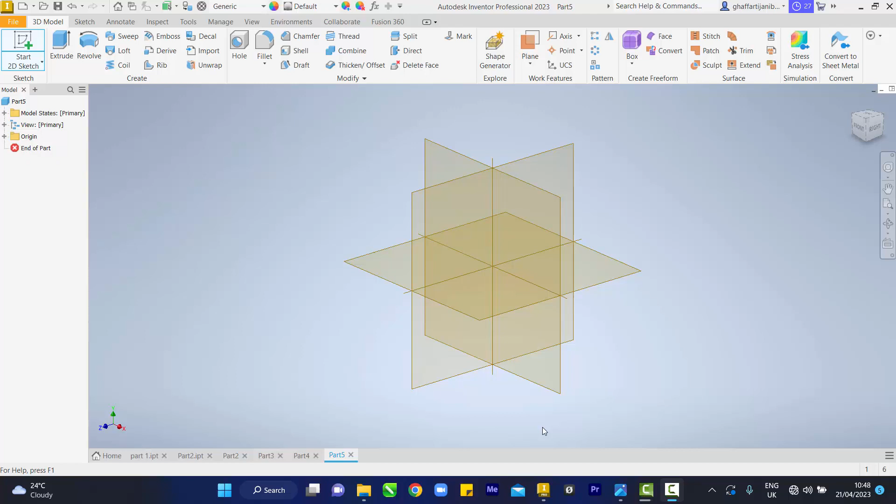Okay guys, next is going to be a bolt.

So I'll pick my circle to diameter 10. Enter. I click OK. Or no, let me try another one. What's the diameter of this guy? Wait. I click OK.

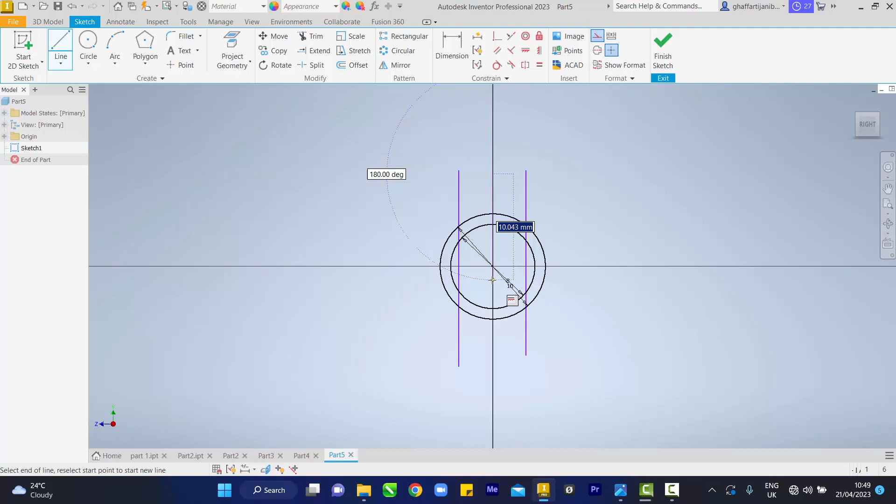Then pick a line to let's draw a very long line. So I'll be drawing a thin line. I just need that to know my center line, that's all. So pick my dimension to, I was told here to here is 5. Enter. Then I pick this 1, 2, 3. I click OK.

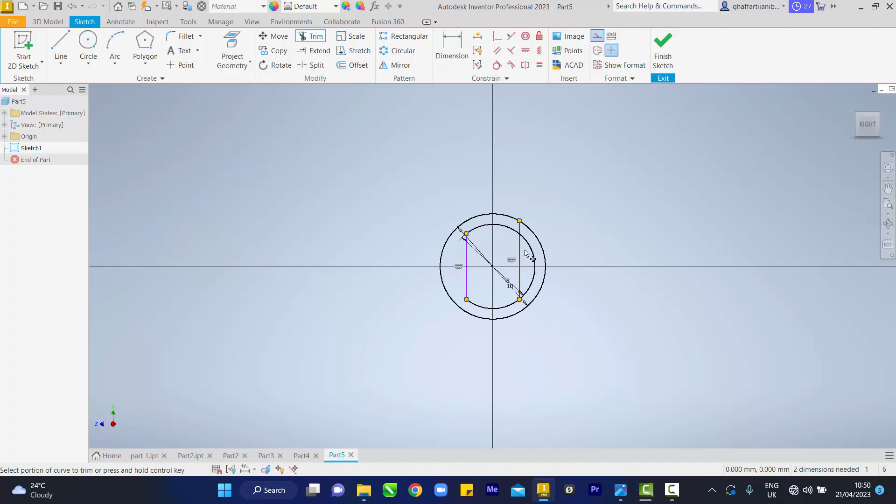Trim. 1, 2, 3, 4, 5, 6, 7, 8, 9, 10, 11, 12, 13. I click OK.

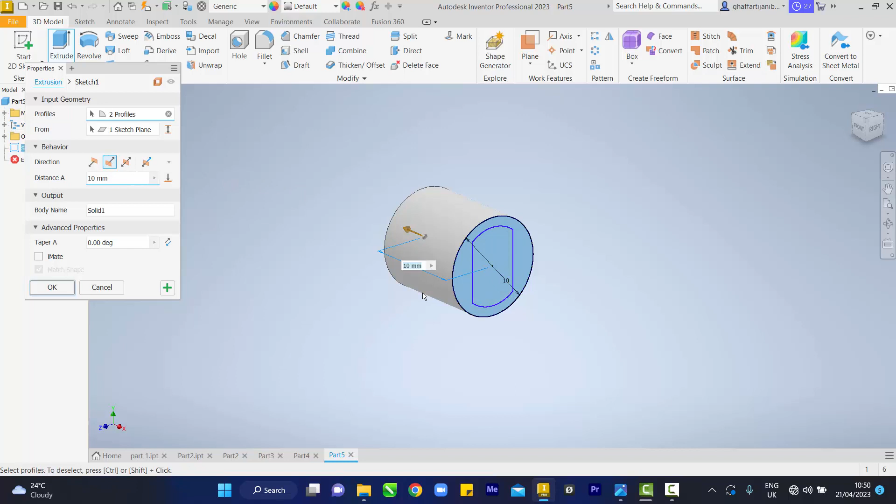Finish sketch. Extrude. Touch up on this guy. It's going backwards.

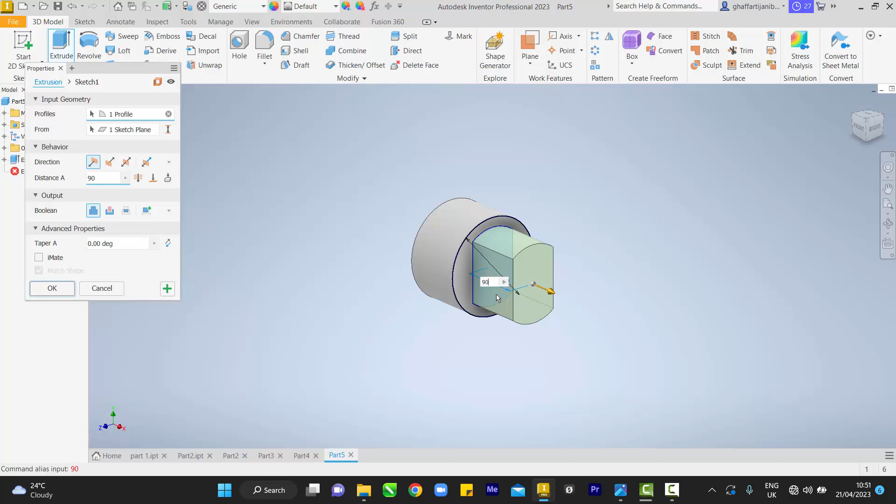And this guy, it's a full block for 6 mm. 6. I click on my plus sign again. Just this guy is coming forward for 96 minus 6 is 90. And to enter. Let's see.

Okay, to resume sketch, we come to thread. We click on this surface and this surface.

So we tell it the depth of our ring is 50, right? Then offset from point: 6, 90 minus 6 is 9, 96 minus 6 is 90, 90 minus 50 is 40. So offset from point 40.

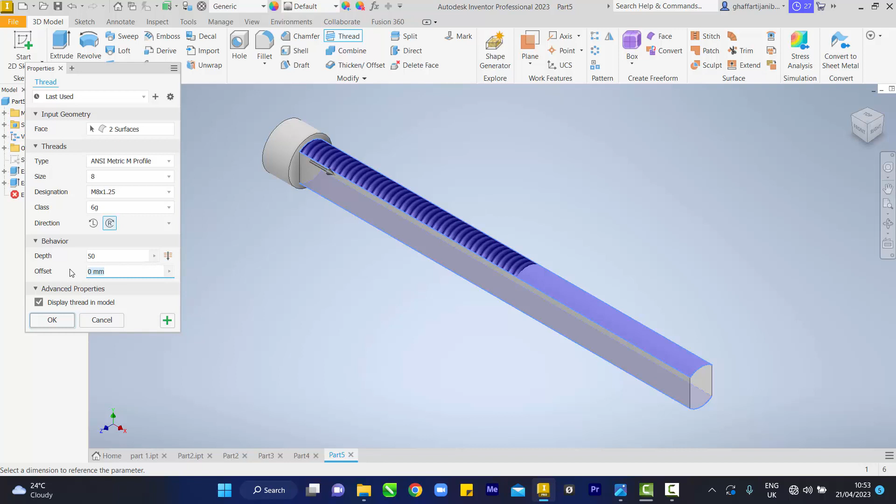Okay. Yeah guys, so this is it. I just want to make it go a little bit.

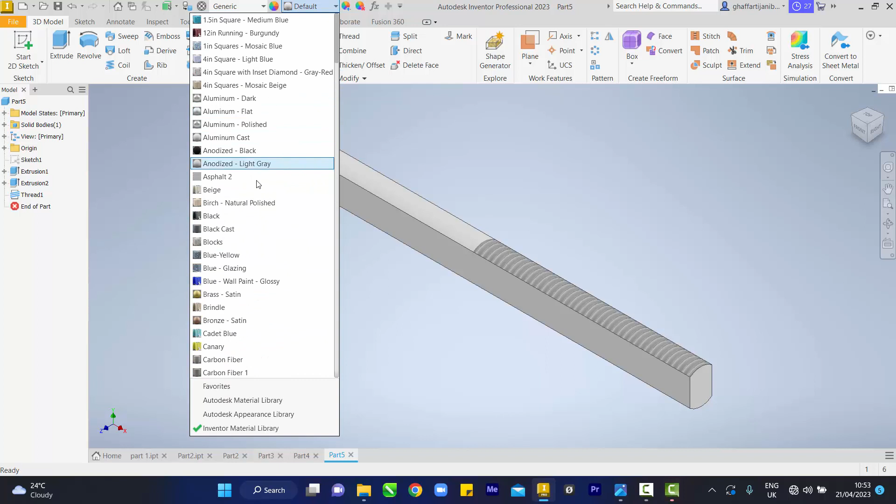Yeah, I use a diamond aluminium. Was it diamond I used for aluminium? Aluminium flats. Yeah.